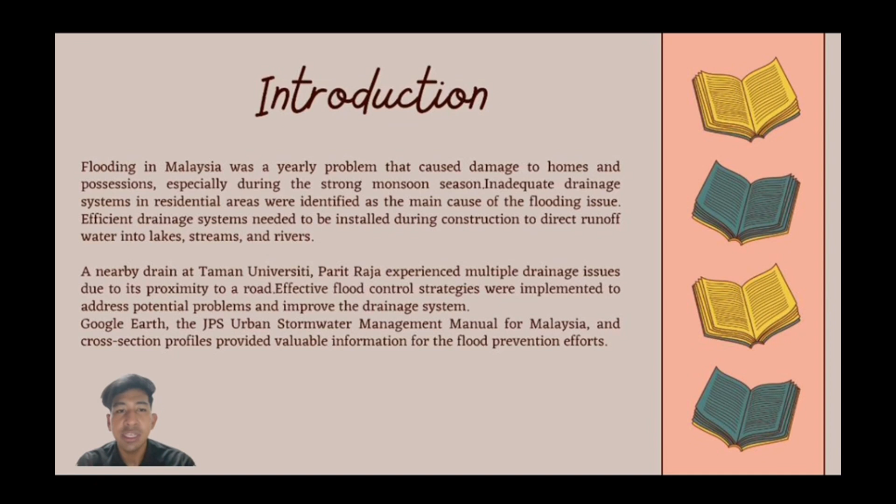At the nearby drain at Taman Universiti Parit Raja, there are several drainage system problems. By assessing them and undertaking in-depth analysis, the city was able to take preventive steps against floods, damage and erosion with a reliable drainage system to keep people and property safe in vulnerable locations.

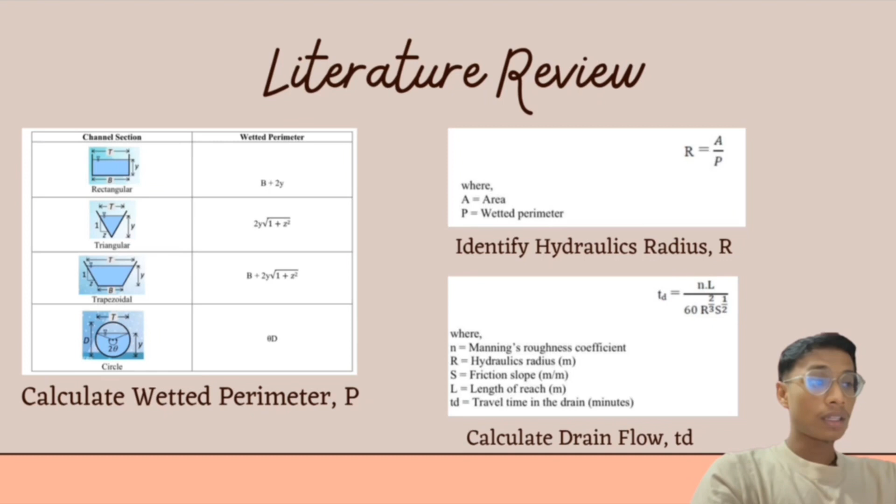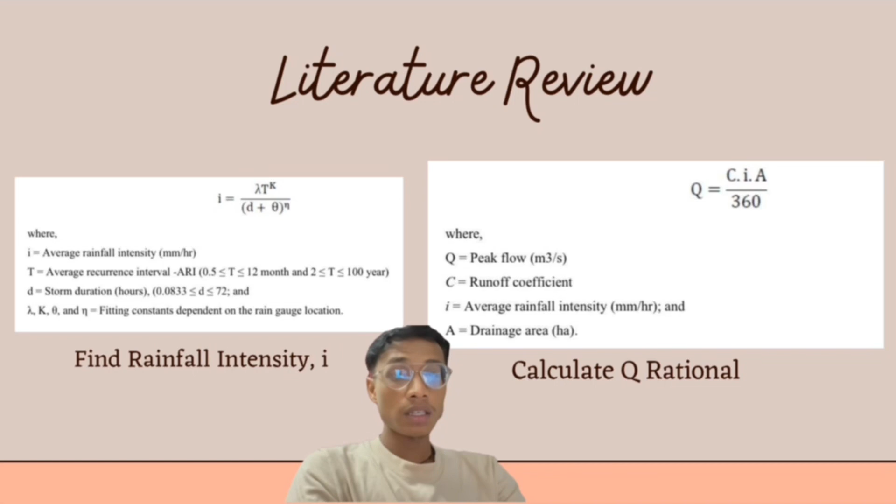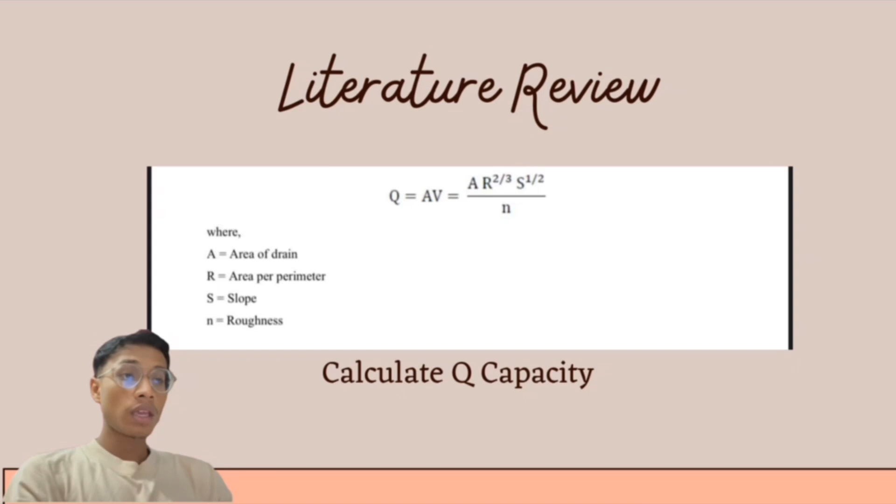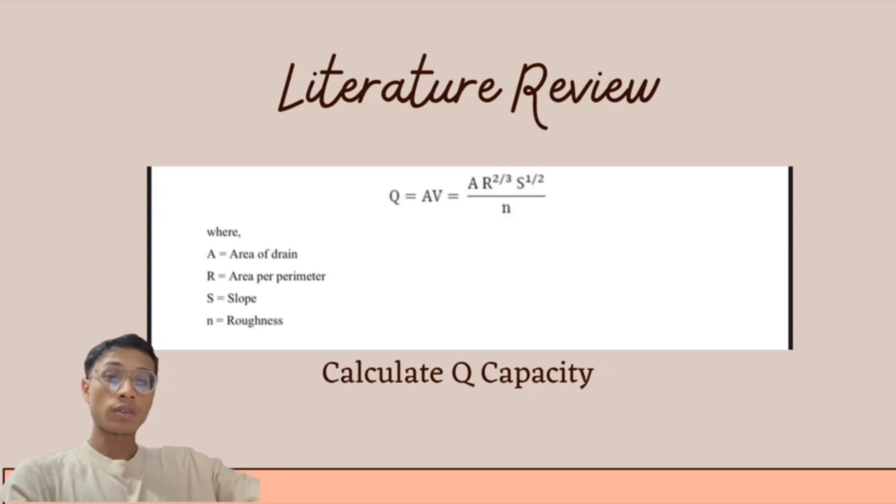Next is to calculate Q rational using the formula Q equals CIA divided by 360, where Q is peak flow, C is runoff coefficient, I is average rainfall intensity, and A is drainage area. The last one is to calculate Q capacity using the formula as you can see, where A is area of drain, R is area over perimeter, S is slope, and n is roughness. That's all for the literature review. Thank you.

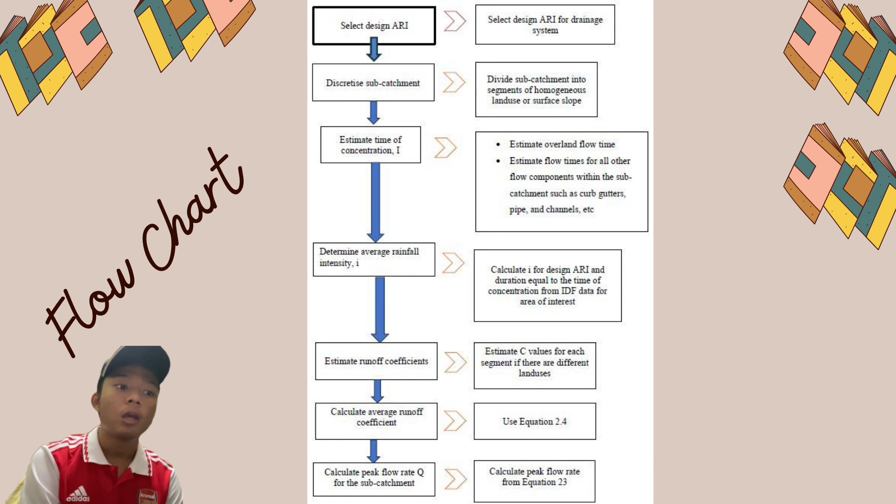Next, determine the average rainfall intensity I. Calculate I for the design ARI and duration equal to the time of concentration from IDF data for the area of interest. Next, estimate the C values for each segment if they have different land use, and then calculate the average runoff coefficient using equation 2.4. Lastly, calculate the peak flow rate Q for the sub-catchment from equation 2.3.

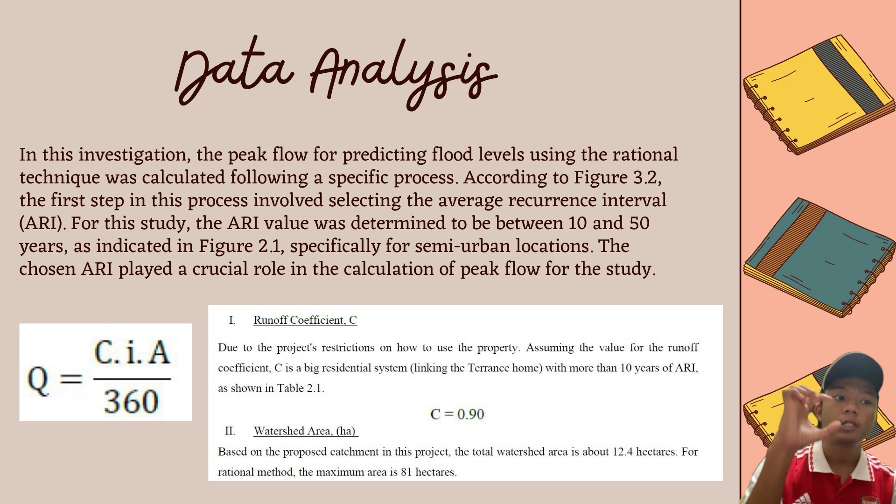In the investigation, the peak flow for predicting flood levels using the rational method was calculated following a specific process. According to figure 3.2, the first step involved selecting the average recurrence interval, ARI. For this study, the ARI value was determined to be between 10 and 50 years, as indicated in figure 2.1, for a semi-urban location. The chosen ARI plays a crucial role in calculating peak flow. The formula is Q equals C times I times A divided by 360. C is the runoff coefficient, equal to 0.90.

Next is time of concentration. To get the rain intensity, the time of concentration needed to be calculated. Based on table 3.1, the drain flow type was chosen because the drainage has already been built in this area. The formula is T equals n times L divided by 60 R^(2/3) S^(1/2). The friction slope S is highest elevation minus lowest elevation divided by the channel length L. So the answer is 0.0041.

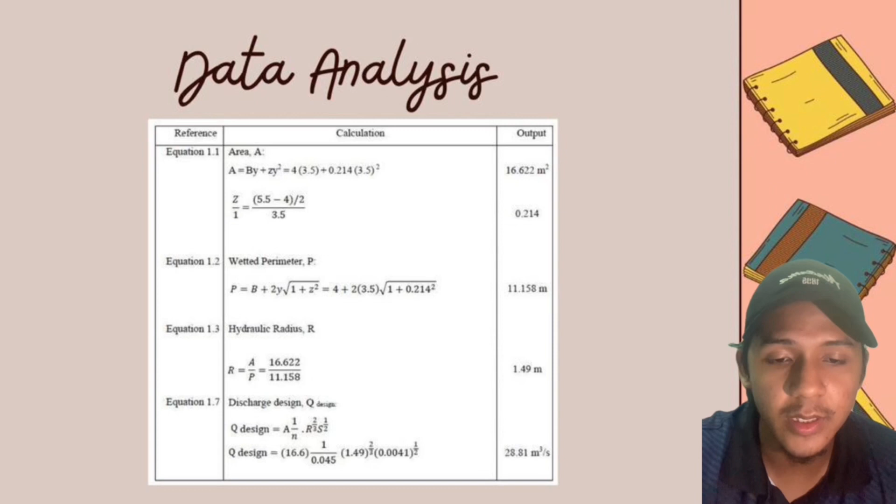Data analysis. So from there we found the primary goal of designing the channel is to ensure that no floods occur in the area. So to achieve this, the new channel section needs to be able to handle a discharge design value that is higher than the peak discharge value. The design of the channel section involves making changes to its height Y, top width T and bottom width B while following a trapezoid shape.

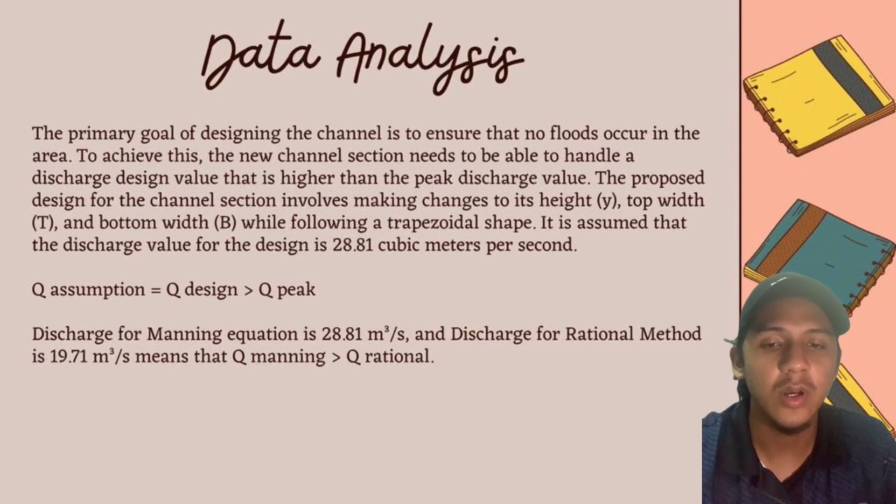Assume that the discharge value for the design is 28.81 cubic meters per second. So we assume Q is more than Q peak. So discharge for Manning equation is 28.81 meter cube per second and discharge for rational method is 19.71 meter cube per second. That means Q design is more than Q peak. So thank you, that's all for me.

Assalamualaikum warahmatullahi wabarakatuh. Today I'll be discussing our gains during the hydraulic project. So based on the site that we have investigated, we identified that the main causes of flash floods in the area are surface pollutants and vegetation, as indicated by the provided data previously. So we propose a larger drain with a bigger dimension, which is 5.5 meters top width, 4 meters base width, and a 3.5 meter height. This is to combat the flash floods.

Also, this is because the larger dimensions of the drain offer advantages in handling a higher volume of stormwater runoff and improved flow velocity. Secondly, the estimated discharge capacity of the proposed larger drain is improved to 28.81 meter cube per second, which is a 46% increase compared to the existing drain.

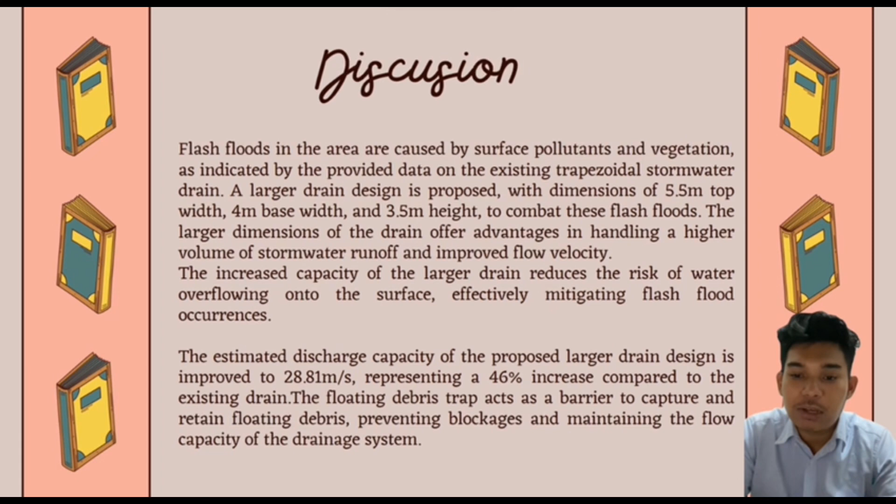Also, adding a floating debris trap acts as a barrier to capture and retain floating debris, especially vegetation which was present during our site investigation. This also will prevent blockages and maintain the flow capacity of the drainage system.

As a conclusion, we have learned that flash floods are caused by surface pollutants, vegetation, and among others, debris accumulation. It is crucial that we take a comprehensive approach. We have analyzed the data and considered the factors involved. So we recommend implementing a larger drain design and incorporating a floating debris trap. The larger drain design with increased dimensions improves the drain capacity to handle stormwater runoff and enhances the flow velocity.

This reduces the risk of overflow and surface flooding. The estimated discharge capacity shows a significant improvement compared to the existing drain. Additionally, the floating debris trap acts as a barrier, capturing and retaining debris to ensure the smooth flow of water, and it also prevents blockages in the drainage system.

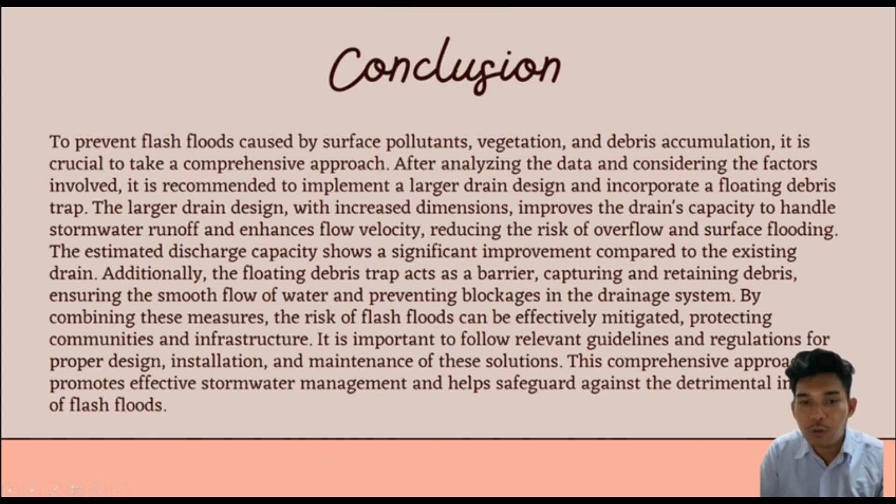By combining these measures, the risk of flash floods can be effectively mitigated, protecting the local communities and several other infrastructures that are present near the site. It is important that we follow relevant guidelines and regulations, which we have followed according to MSMA 2. This comprehensive approach promotes effective stormwater management and also helps safeguard against the detrimental effects of flash floods.